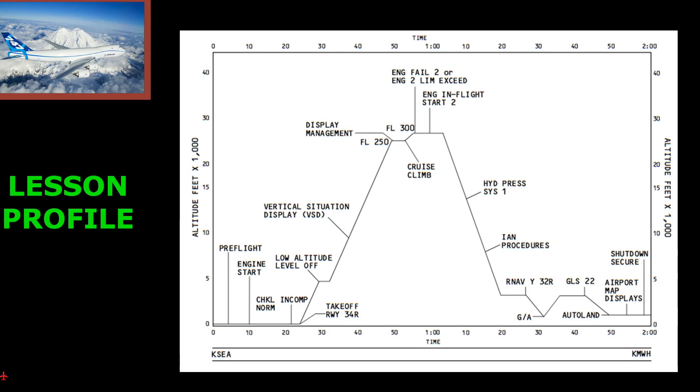Some airlines will add simulator periods after this. Not many, but some do. And I always thought that was a good idea, but there's not that many airlines that do that.

We talked about this when we do start the engine. We will have the auto start appear above the N2, and you'll have the little green tick marks indicating the idle target indicator - that's where the engine can sustain itself at idle. Once it reaches the idle target indicator, it'll go to running. Running will appear for 30 seconds and then disappear after that.

In the case of an engine failure, it will attempt continuous relight, and you'll get auto relight above the N2. Again, we are going to start engine number 4 first because of the ground pneumatic start with the APU inoperative, and then we'll cross bleed start 3, 2, and 1.

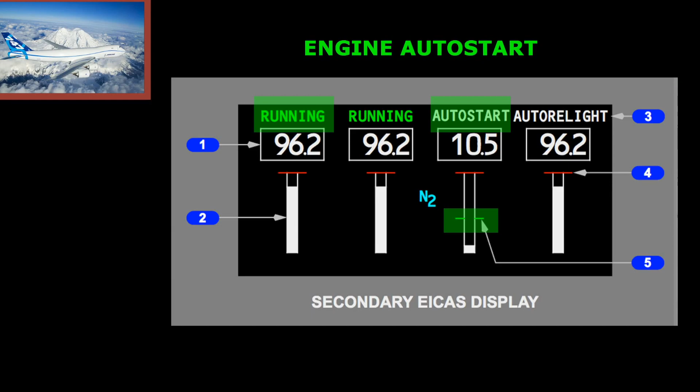And we'll start one engine at a time, as opposed to auto start where we started 2 engines at a time. Checklist incomplete norm—we said there are 3 conditions on the Dash 8 that would cause that.

Before takeoff, it's if you're aligned with the FMC runway and have not completed the before takeoff checklist. Approach would be if you're below the FMC transition level and the flaps are not up, and you have not completed the approach checklist—you'll get the checklist incomplete norm EICAS alert message, which is a caution.

And then landing: if you descend below 500 feet above the FMC landing runway and have not completed the landing checklist, you'll get the checklist incomplete norm. Again, I'm going to not complete those checklists, assuming I remember, and then we will see that message come up in all 3 situations.

I think our initial clearance was climbing to 4,000 feet per the clearance. On the HAROB departure, DME, IRU, or GPS is required, and RNAV1 is required. Again, we can see that on the Dash 8 right on the ND where you'll have the RNP, and we are checking that it's 1 for the departure and that the ANP is within that. Again, radar required—we read all the notes.

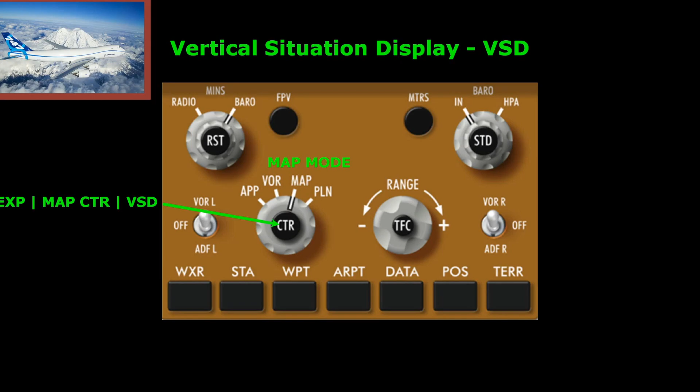We said the VSD would show a representation as if you were looking at your airplane from the right side, in terms of a vertical profile and a lateral profile, with mileage going out on the x-axis and altitude on the y-axis. And of course you then have a vertical segment that you're looking at.

The vertical segment you're looking at is what's included in the en route swath. We said the en route swath, which is number 1, would not appear on takeoff until you're above 2,000 feet and more than 6 nautical miles from the runway, and then it would appear. It would disappear when you get below 2,000 feet and within 6 nautical miles of the runway—so it disappears on approach and appears on takeoff.

In the PMDG model, it's there all the time on takeoff. It doesn't disappear, so it's kind of wrong.

You can see the RNP for the departure that we can check says RNP1. You're going to get the RNP, ANP, and the lateral deviation. When you're on the vertical profile, you'll see the vertical deviation indicator, which also includes an RNP and ANP.

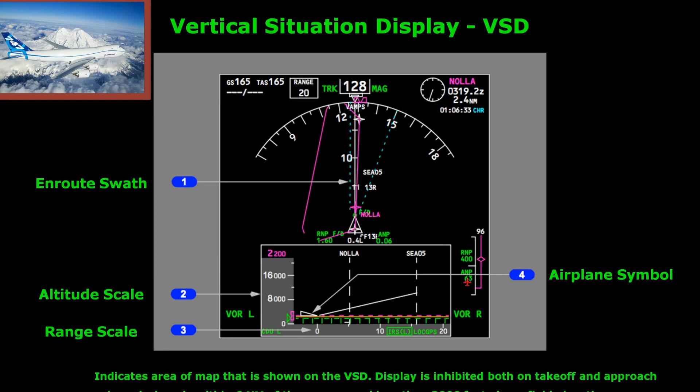Here's a cross-section of the vertical situation display. You have the vertical flight path vector, which is the white line that goes out from the airplane symbol. The airplane symbol is an elongated triangle, as if you're looking from the right side.

The range to target speed dot is that little green dot that appears usually 15 knots prior to your target speed, and it goes out at 5 knots from the target speed. Like a little ball along a straw, it moves along this line as you approach the target speed.

If you're in vertical speed, you'll get a dashed magenta line that varies depending on the selected vertical speed. You also have a terrain indication that appears as green, amber, or red depending on the terrain you're approaching or that's underneath you.

You'll also have a 3-degree reference to the runway. It'll be a dashed cyan line if no approach is selected. If an approach is selected, it will generally go to a solid magenta line showing the profile for the approach.

You'll also have gates at 1,000 feet and 500 feet. The 1,000-foot gate would be white, and the 500-foot gate would be amber. This correlates with what you have on your altitude indication on the PFD, with the bars at 1,000 feet and 500 feet. And the runway will also be displayed.

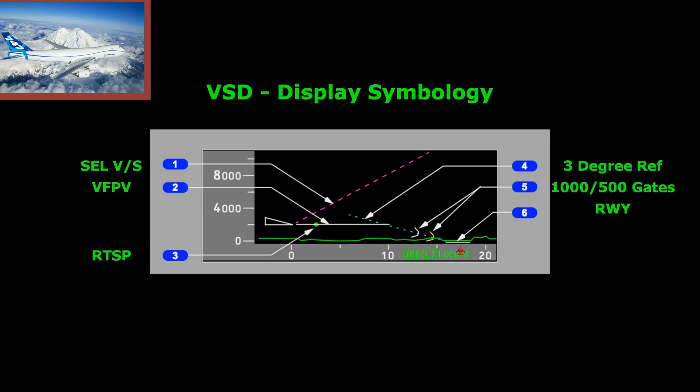On the VSD, anything selected on the MCP as far as altitude will show up as a dashed magenta horizontal line. If you set baro minimums, that will show up as a dashed green line on the VSD.

Altitude restrictions will also show up as triangles. If it's an 'at' restriction, it'll be two triangles pointing at each other. If it's an 'at or above,' the top triangle will be gone. If it's an 'at or below' restriction, the bottom triangle would be gone, leaving just the top triangle.

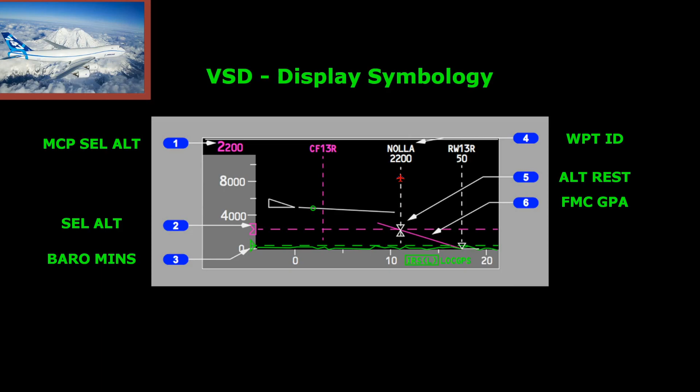The FMC glide path angle will be represented by a solid magenta line. Restrictions show up along with, if we have a restriction at that waypoint, a dashed vertical line.

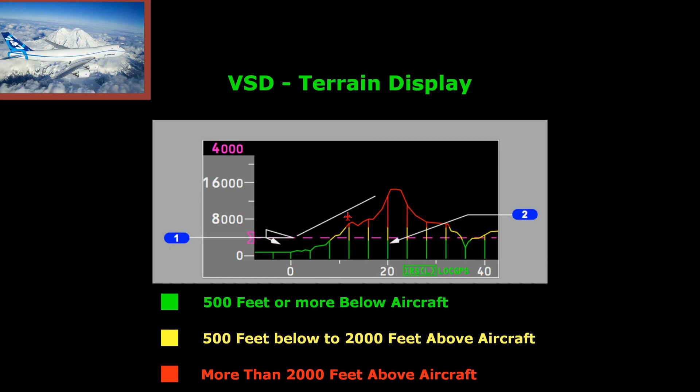We saw a good representation of this with Mount Rainier: green represents 500 feet or more below the aircraft, amber represents anywhere from 500 feet below the aircraft to 2,000 feet above, and more than 2,000 feet above, the terrain is painted red. As the airplane approaches that terrain, if we were going to climb away from it, the vertical flight path vector would show how we're going to be in reference to that terrain.

The EICAS display select panel shows which display we have selected as the MFD, the multifunction display. The electronic checklist is normally displayed on the lower center MFD.

With an engine failure, we can also display the secondary engine instruments on the inboard display by going to left inboard or right inboard and selecting engine. That secondary engine display will show up on the inboard display, so you can see that it's attempting a relight.

To do an engine in-flight start, we go to the non-normal menu, then to unannunciated checklists, and dig down to engines, then to engine in-flight start. Many times the checklist will lead us to the proper non-normal checklist, but there are times we may have to dig down into tiers to get to the checklist we want, especially for unannunciated checklists like fuel jettison.

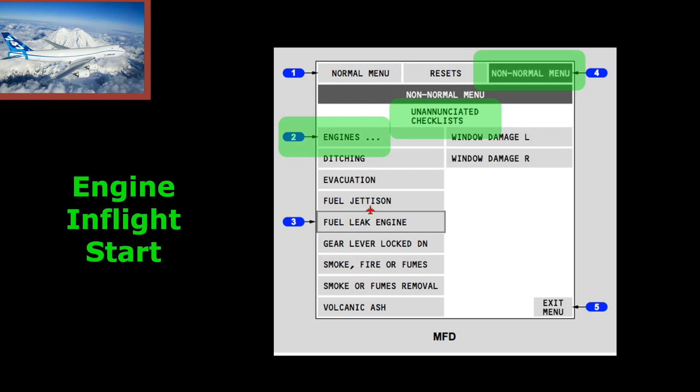They don't come up automatically, so we'd have to go into the menu, in this case the non-normal menu, then into unannunciated, then to the appropriate checklist, like fuel jettison. There's the auto relight, which we talked about—that will attempt a continuous relight when an engine does fail.

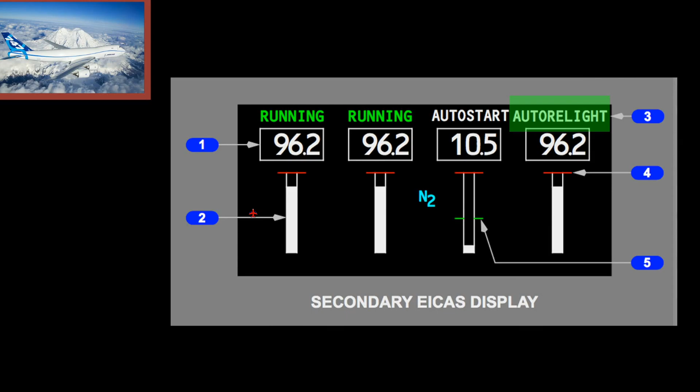Generally, the approach RNP requirements for an NDB approach would be 0.6. Again, we could check that right on the ND with the RNP. For VOR, it would be 0.5. For just an RNAV approach, 0.5. For RNAV GPS approaches in the 400, it's 0.3.

In the Dash 8, it's meant to get down to 0.1. When I left, we still used 0.3. It wasn't approved for 0.1. I don't know if it's approved for 0.1 now, but it can go as low as 0.1.

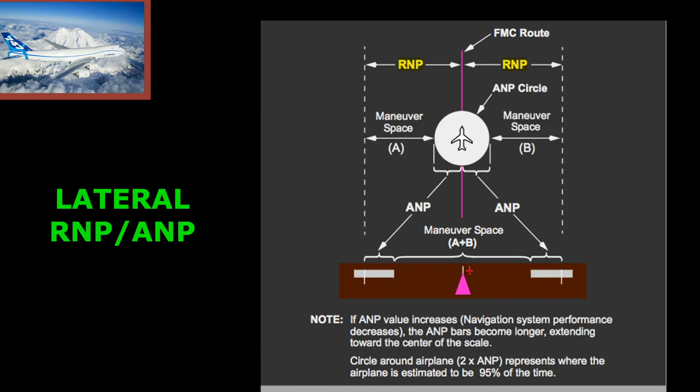And again, your airplane position in reference to the lateral navigation, like in this case if we were on LNAV, would be displayed as the difference between the triangle and your vertical line, which is where you are. Here's a representation of, for example, the LNAV course. And if we end up left of our route, the LNAV course would show to correct to the right, and that would be represented by the magenta triangle.

And again, the airplane position would be right here, and the triangle would represent the LNAV position. And in this case, you can see the airplane position is to the left of your routing. We need to correct right to get back on course. If you're right on the route, or right on the lateral profile like LNAV, the magenta would be lined up with the airplane position, which is the single vertical line, and we would be right on course.

If we end up to the right of the route, then the pointer will go to the left. Again, the airplane position is right here. The pointer is the difference between the airplane position and the LNAV course. And you can see in this case we are to the right of the course, and we need to correct to the left to get back to the center line.

This would represent a large FMC position uncertainty. The bars are bigger, and you can see the ANP has grown, and it's getting closer to the RNP limit. And you can see here that if we were to get to the left of the route like we are here, we need to correct right to go back to our course.

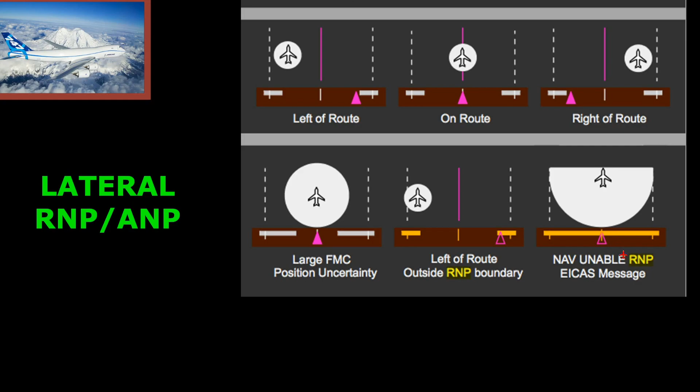Your aircraft position has changed in reference to the RNP, and we're infringing on the RNP now, so it turns amber. If we were to get a large FMC position uncertainty that continues to grow, eventually these two bars would touch. If they touch, it'll go amber and you'll get a nav unable RNP message, because now the RNP equals the ANP, and you don't have the required accuracy to maintain the RNP limit. Same thing happens on the vertical profile.

So you can see here it says the vertical nav performance scale displays the same relationship between the maneuver space and the ANP as the lateral navigation performance scales do.

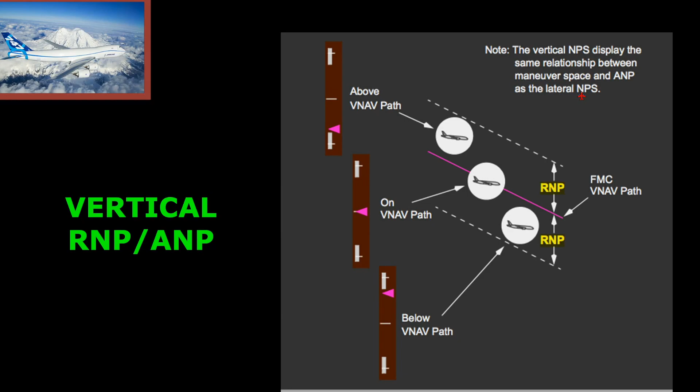This would show if we were to infringe on that, getting below the path, and now we cut into the RNP with our accuracy circle, the scale turns amber. And again, if the error, the ANP, grows and the two white lines touch, the ANP will equal the RNP, the whole scale will turn amber, and you'll get an unable RNP message as well. You can see in this case we're right on the path, and the ANP is within the RNP, so everything is really good here. That's what we want to see.

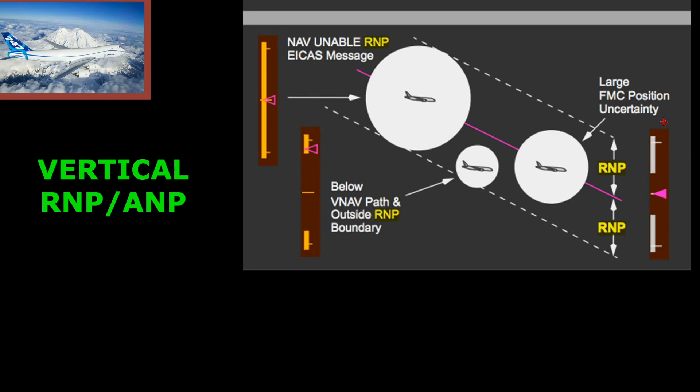Although an IAN approach is not an ILS approach, it has the same alerting as an ILS approach, which is the advantage. The other difference is it is not to an auto land like an ILS approach would be, where we have land 3. Normally we would disconnect at some point and manually land, unless we're doing Cat 2 or 3 approaches, in which case it would be an auto land.

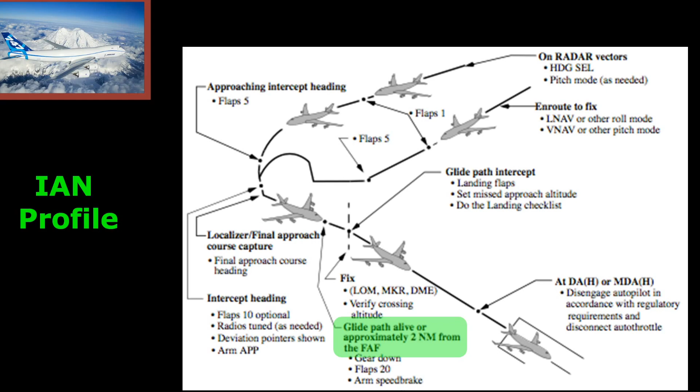But in the case of an IAN approach, flare and rollout are not going to arm, and you would have to disengage the autopilot. Just like in any non-precision approach, you would have to disconnect the autopilot in accordance with regulatory requirements, and then disconnect the auto throttle for landing.

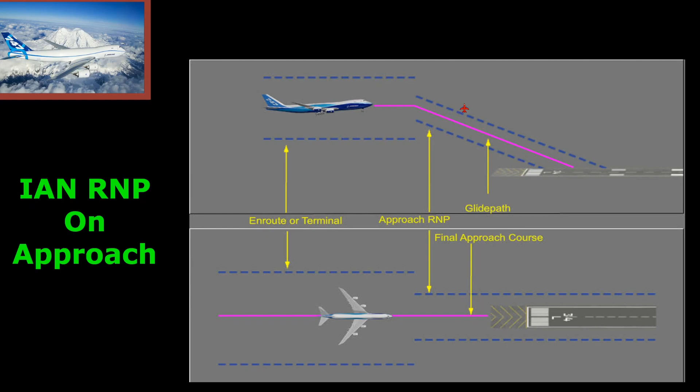That happens vertically, and that also happens laterally, where the RNP may be 1, but it's going to narrow to 0.3. Vertically, the RNP is going to narrow as well in terms of feet. Some of the things on IAN approaches, they did this primarily to be standardized on non-precision approaches.

In other words, one procedure fits all. Whether you're doing a VOR approach, an NDB approach, or a RNAV GPS approach, it's one procedure. It is a non-precision approach with no auto land capability, so you have to manually land. The big advantage of this is the alerting is similar to an ILS approach. So if you get off the glide path, you're going to get alerted to that fact. You'll get the GPWS glide slope, glide slope, glide.

It won't say glide path, but it'll say glide slope, indicating you're getting off the glide path. IAN approaches have to be selected from the database. You can't build anything with an IAN approach. You can't modify it from the final approach fix inbound. It has to be exactly as it is from the database from the FAF inbound.

It's a QNH only approach. QFE is not allowed. You must have a published glide path angle shown on the legs page. Normally that's going to be 3 degrees, but it could be different depending on the approach. All engines or engine inoperative approaches are authorized.

And the RNP has to be appropriate for the approach that must be used. So again, if you're doing an RNAV GPS like we are today, we'd have to have 0.3. But on the Dash 8, it can go down as low as 0.1, but I'm not sure it's there yet. Raw data monitoring of the localizer is required for all localizer-based approaches.

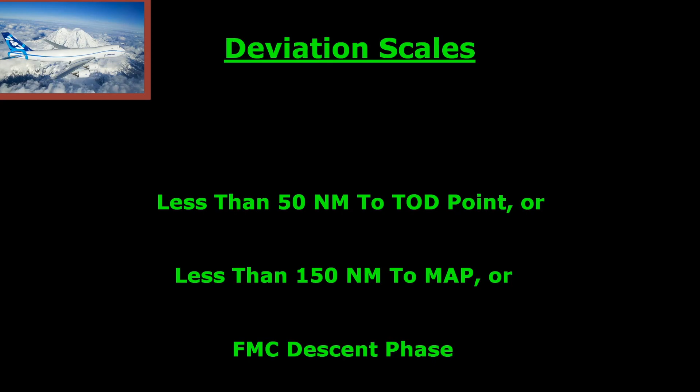Generally, the deviation scales on your PFD are going to show up when you're less than 50 nautical miles to the top of descent point, or you're less than 150 nautical miles to the missed approach point, or you're in the FMC descent phase. Whichever one of those occurs first, that's when the deviation scales pop up on your PFD. The IAN pointers themselves will appear when you're less than 25 nautical miles from the missed approach point, within 60 degrees of the final approach course, and less than 6,000 feet above the landing field elevation. All three of those have to be met.

Whereas in the other case, any one of those three could cause the deviation scales to appear, the IAN has to have all three of these things: 25 nautical miles from the missed approach point, within 60 degrees of the final approach course, and less than 6,000 feet above the field elevation. Then the pointers themselves would pop up.

We can arm the approach when you're cleared for the approach, you're on an intercept leg for the approach, the IAN pointers are displayed on the PFD, and in the case of a localizer approach, it's been tuned and identified. If all those are acceptable, then you can arm the approach when you're clear for the approach, and at that point the mid scales will appear on the PFD. Again, localizer based would be the diamond symbol, FMC based would be the triangle symbol.

If you were to leave the autopilot engaged below the MDA or the DA and continue to descend with the autopilot engaged, if you get to 100 feet you will get the no auto land EICAS message. You'll also get the no auto land on your PFD, and you'll get the caution. There is no flare or rollout armed, so you're not going to be able to auto land. And then if you continued to 50 feet RA, you would get amber lines through the roll mode and pitch mode, FAC and glide path.